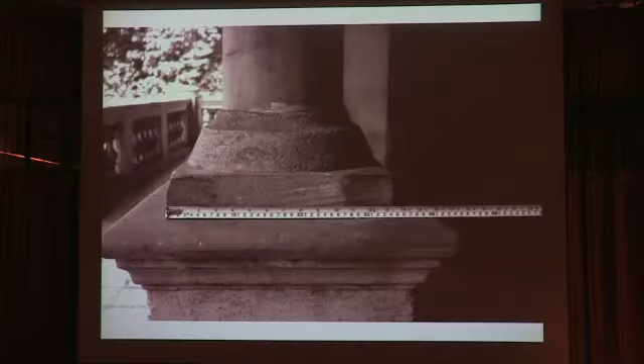The fallout of this work was interesting. Some of it led to legislative measures, and also spawned institutional structures and group research. We also began to engage with documentation—measuring and learning again how to put your hands down, to touch something, to scale it, to represent it—which was so fundamental, especially in this age where technology sometimes overrides our own intuitions.

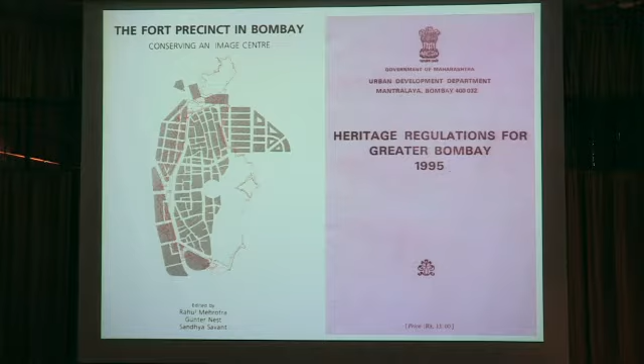And some of this documentation became cumulative and led to legislation. This was the first legislation to protect heritage precincts in India, which came out of some of these research and engagement efforts. And the documentation was widespread.

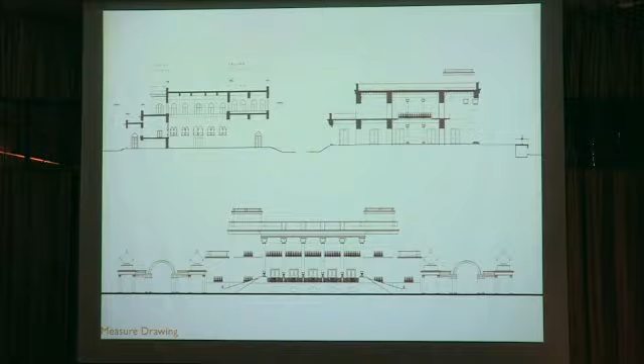We were involved with historic buildings. I'm not going to talk about those today because that's a lecture in itself, but Jim alluded to some of this—actually measuring these buildings where there was no information, and the hundreds of drawings that were constructed as a result. This research and engagement with the issues of the city and its governance led us to understand that the notion of significance is something continuously made and constructed.

It gave us agency to grapple with these conditions, historic places, in different ways. And significance is not about discovery or articulation as much as it's about engagement, construction, and making.

In fact, in cities like Mumbai, meanings are not stable. Even the name changes, as you know. And here spaces and images get consumed, reinterpreted, recycled.

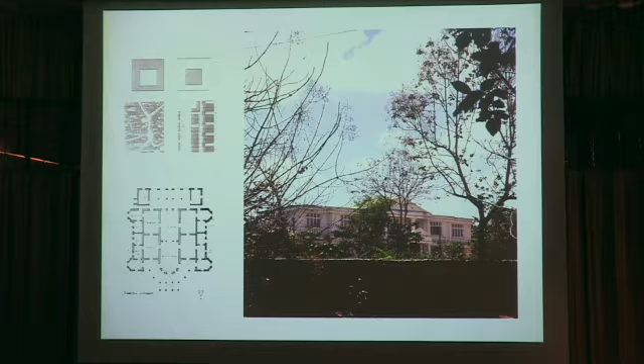And so then can you actually work around this? We attempted that, because as a practitioner starting out there, our first commissions were houses for urban people who wanted to build weekend places in these rural kind of locations.

In this house, for example, we made a gesture of generosity, and the client was enlightened enough to understand it, where the living room of the house was a big veranda, and the chairs all go in, it gets closed, and this space is a gift to the villagers with the tap. So while they're not there for most of the year, the villagers can actually inhabit it. I've even seen a wedding occurring there, the caretaker and his friends, etc.

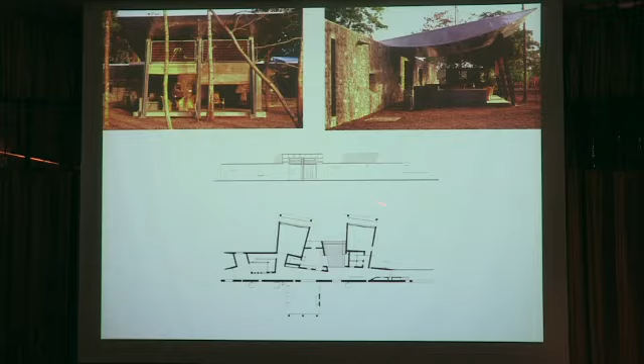But it's a way of softening the threshold, and these signals in architecture, I believe, are really important. So that's the space that's sort of a gift to the village, whereas the bedrooms, etc., are more secure. They face a garden, with all the paraphernalia, what a suburban house might be.

This was another example where we built a house in an orchard in Ahmedabad, outside Ahmedabad, and instead of placing the house in the periphery of the orchard, like most of these houses are, which is part of the colonial paradigm, we decided to place the house absolutely in the center of the orchard with a natural water body there, which without chlorination, serves as a lap pool for the residents when they come there on the weekend or once a month.

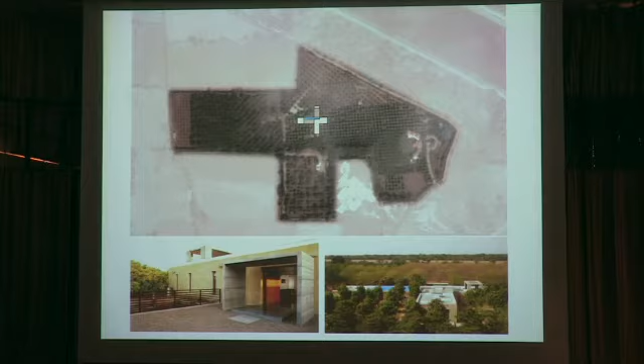But then it becomes a pool for washing the fruit, which the workers in the orchard can use. So by changing that relationship of the master's house commanding the orchard versus it becoming a kind of working unit within the orchard, I think it begins to signal different things.

And this is the water pool, so it's photogenic, it's a lap pool which people enjoy. They enjoy the courtyard, the privacy, but when they go away, there's another door which allows access to the villagers, and you can unplug this and it charges the well. So there's no filtration or chlorination plant in the house, and you have a separate entrance.

So the workers then occupy, and they have a different association with the space, and they appropriate it, so to speak, for most of the year. I think these are little ways in which these spatial arrangements can be modulated.

In fact, locally it's called the tea factory, which is very nice because it's not associated as the house of rich people, but rather people think it's a tea factory. And the production of tea sort of goes on. Of course, it's a very sensitive landscape.

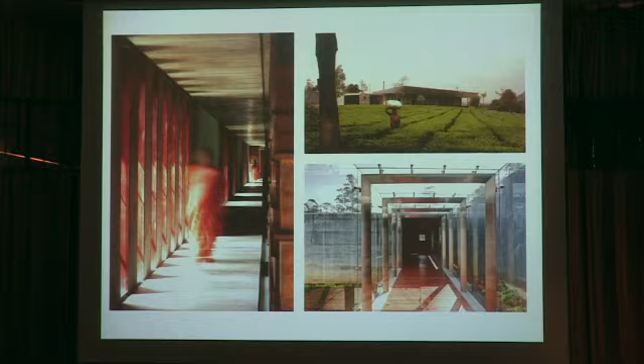So it's very transparent, and it doesn't give out the signals of being something that's cut off from that terrain, but rather transparent and therefore visually accessible, in a working tea plantation. So this sort of symbiosis between these two completely different cultures, where urban cultures are coming to bear on a kind of suburban condition and threatening in some ways, is dissipated by softening, I believe, these thresholds visually.

Then the question of building ecology, and that's one that's really, really important, because I think sustainable design, as we begin to see it, should be a combination of social ecologies, economies, and physical design, and this sort of gets siloed in our debates.

In fact, Mohsen isn't here, but one of his early books called Weathering was very insightful, and I learned a lot from it and realized that our debates have become about weatherproofing. They're not about weathering. And so our materials and the selection of materials don't account for weathering.

Rather, all the emphasis is on sealants and double insulation. And so weathering has moved to weatherproofing, which means we've really taken climate out of the equation and out of the discussion. And so therefore, the palette of materials that we've shifted to has also responded to that shift in mindset in the way we look at this.

And I think that is an important reminder because it opens up a whole world, not only in terms of material textures, but it's a critical question when we talk about sustainability and these broader ecologies.

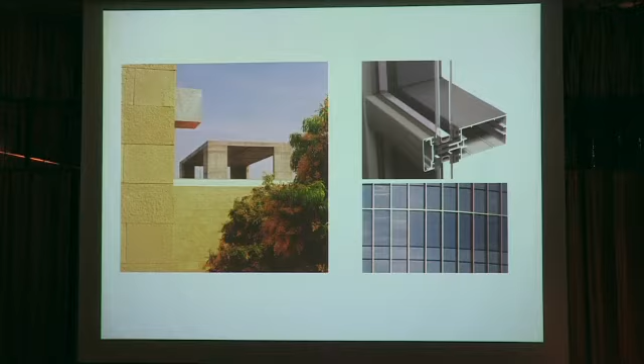In India, when I started my practice, things are now better with the economy, but 20 years ago, you were always afraid that your building would stop halfway. So we began designing buildings such that even if they ran out of money halfway, it didn't look incomplete. We were always preempting or anticipating this sort of extreme condition.

And so this imagination of design as incremental, I think, is something that we very much picked up on. And the social is one of the materials of architecture that we cannot escape working with.

I think if we talk about sustainability and we don't talk about the social as material, it can't be the only material, but it has to be something we articulate a much finer debate around, because its implications on the organizational aspects of buildings is as much as technology and more obvious material components that actually make the building.

And I believe the rating example, or the rating approach, when we talk about climate, is how this broader ecology of building is ignored in the quest for focusing on material. I think the rating in particular tends to perhaps unwittingly create a hegemony of the US codes universally. And we deal with this in India all the time.

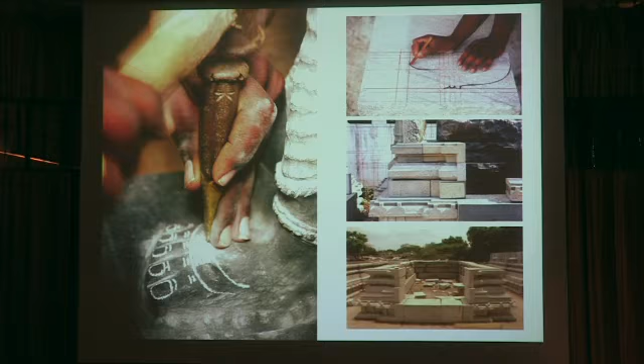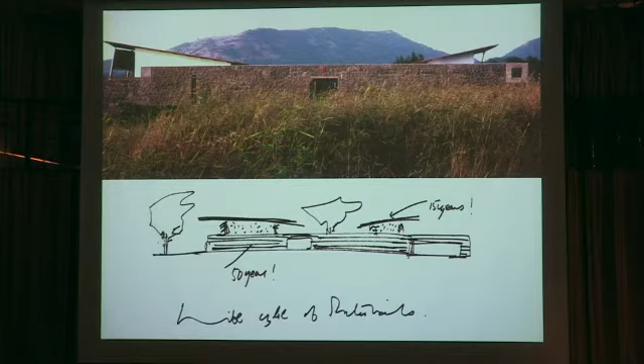The lessons through conservation back into contemporary practice are at many levels. It's understanding practices, it's also understanding how materials weather, and understanding how materials weather is related to crafts. I think this is something that needs much, much greater discussion.

Then, of course, the question of the local and global. We've always heard think globally and act locally. Unfortunately today the most powerful people in the world are people who think locally but have the ability and power to act globally. So there's a complete inversion.

That's the reason I've divided the next part of this talk into local programs and global programs, because I believe the real challenge is how do you localize global programs and how do you globalize local programs? I think this is a very interesting question for me.

And here, for example, the presence of the ancient, the presence of religion in the way it's related to craft making and building is very important. There's a resurrection of what we call Vastu, which is like Feng Shui, and it's amazing how this has become a full-blown practice in India. I would say 90% of our buildings actually have incorporated this. What does that mean? Why do you resist it, or how do you resist it?

Because it's actually quite abstract, it doesn't stipulate form at all, it only stipulates location. The practice of Vastu and its popularity is clearly bringing a new conservatism, in a sense, to the realm of architecture and the innovation of form, without necessarily challenging the emerging vocabulary and imagery of global identities. So it's interesting how one is challenged by how one can actually embed this in the work.

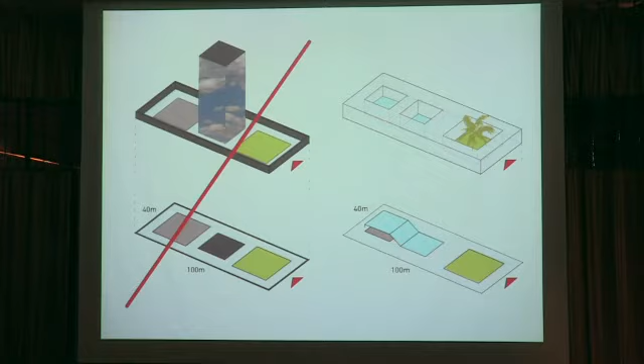They had a 40 by 100 meter site. They wanted a high-rise tower. They had a collaborator in Australia who was going to give them a license to bring curtain glazing, parking at the back, garden there. Of course we argued, we were despaired by this whole idea, and we managed to convince them to go into the big footprint building, and it raised a lot of interesting issues for us because this was when we were just liberalizing our economy and everyone wanted the icons of globalization.

I felt that this company was so well situated, they were very sophisticated people, that they could confidently build their own identity, not responding to the sort of globalized materials, but actually beginning to pick up on the traditions that occurred in the area of Coimbatore, which is in South India, where this building occurs.

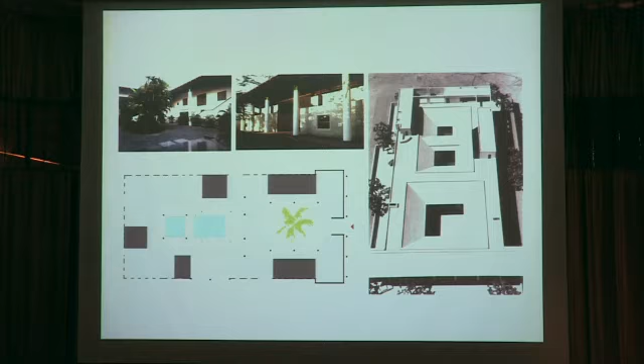Sorry, these are burnt out a bit, but it's organized around a series of courtyards, and this is a sort of progression through the courtyards. It's got a large roof which holds the top of it, and these courtyards actually have water which helps to cool the building, so it's passive cooling, and that's what the spaces feel like.

It's all ventilated corridors. The offices are just one room deep, so you have natural ventilation. There's about a 6 or 7 degree centigrade difference between the outside and inside because this is in the rain shadow. It's very dry, and just the circulation of water, the noise of water, has an incredible cooling effect on the building. And the verandas or the circulation spaces are what are used for meetings, or people come out to meet each other from the 7 or 8 offices of this corporation that are housed there.

As you go into the building, it gets more intimate, where the management sits, who are the owners of the building. It's a large family. It's a family-owned building, so it sort of alludes to a house, and the scale changes completely.

But it's naturally ventilated. It's got air conditioning provision, but they use it when they need to, which is very minimal. It also uses the local materials of the area, like it's a 20,000 square foot clay tile roof with 2 sets of clay tiles, one decorative and the other a regular roof tile, so that you get insulation, but you also get these patterns.

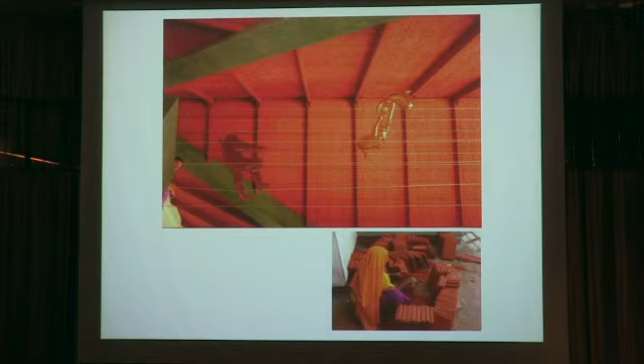I believe at the time it was done, in 1995, 96, it was the largest tiled roof being built in India, because people were only building those for homes, and they'd abandoned the use of this very simple, very beautiful material. And also granite, for example, we use granite from the local quarries, but we trimmed the edges where you had the drilling from the quarries to create a waterfall, so you got the ripple effect just out of the edges of the granite.

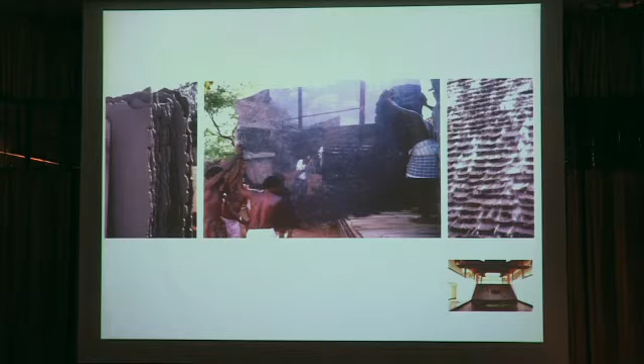So no material was really wasted, and that really was a constraint we set ourselves, and it really worked out that the waterfall needed something like this. And of course, art of many kinds was incorporated.

This is the Cosmic Egg, which is a very precious piece, which was displayed. These are 10-meter, 20-meter wide murals painted by traditional painters from Kerala who don't even use a sketch. They have poetry they recite while over 10 or 15 days they construct these murals. So we incorporated a whole range of craft.

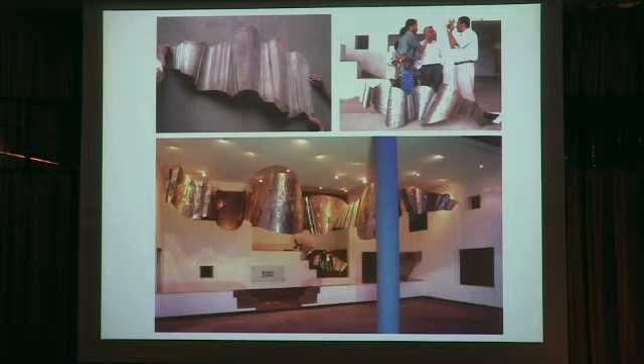This is what would be traditionally made in cloth, but it has 108 Lakshmis, because Lakshmi is the name of the company, which is the goddess of wealth, of course. And the 108 Lakshmis are sacred, so that's the figure that was used.

And Manjit Bawa, who was one of India's well-known painters, who only painted on canvas, worked with us - that's him in that image - to translate his figures to create railings for the building. So all the railings in the building are his figures, scenes from forests and animals that dance through the space.

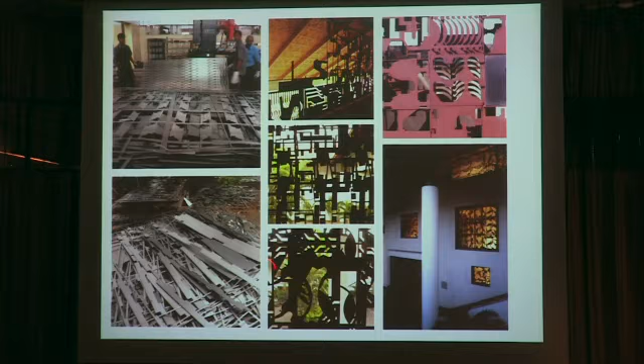We also used scrap metal from their machine tool companies to create traditional jalis, or screens, that facilitate natural ventilation. We created about 24 patterns with different artists using scrap metal from the machine tool plant, which we salvaged as they were doing pressings for different components of their machines. This created a whole vocabulary of screens right through the building, and the porosity of the screens changed depending on where they were placed, if in front of toilets or in offices.

So depending on the porosity and transparency, the layering was what we played with, and it was constructed in a way that it could be dismantled easily, to be cleaned periodically, etc., including this sort of large end portal.

This is really a global program, and this was an extreme because we got engaged with this not only at the beginning of our own practice, but also at the beginning of the liberalization of the economy in India. We felt very strongly about resisting these sort of global images that land on our doors - this is not our project, but these are the kinds of things beginning. This is in Jaipur, which goes up to about 46 degrees centigrade.

And it's mad - these are IT centers, and with information technology in places like Bangalore, everything is being built like this, which are just basically wrappers. It's ridiculous because when you go into these buildings, they have very expensive blinds which have to come down, otherwise you get glare on your computers. So you don't get the view out there, so why are you using the glass? It's really related to image, and it's extremely expensive.

After this, we got this project for Hewlett Packard from Palo Alto, but they were building in Bangalore, and we got appointed to do the second phase of their campus. The first phase was built by another Indian architect, which followed the same pattern that I just criticized, and therefore I will not name him.

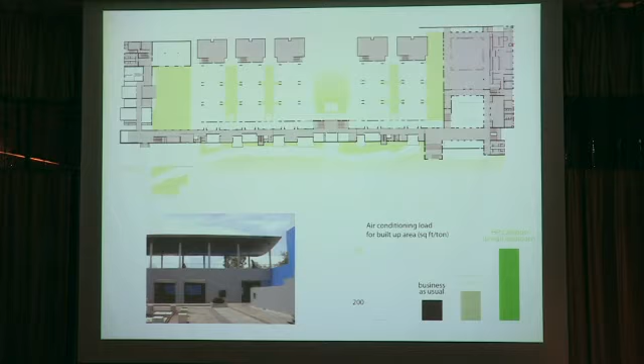In that street, you can play with architecture, with light, with volumes, with places people can sit, different materials. It's more social - people meet, people can see each other, they can set up points of meeting, rendezvous points. It sets up a completely different vocabulary, which in the other building I showed you is an impossible thing to achieve.

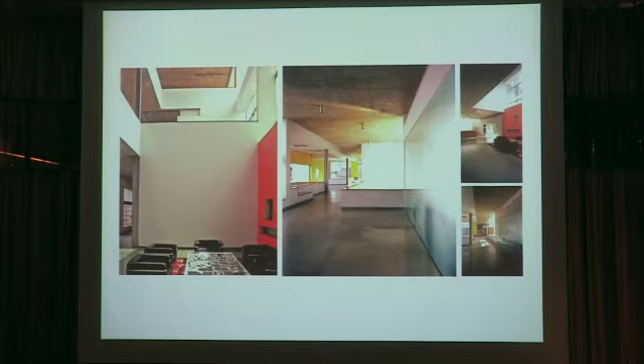And that's what the dining rooms feel like - different pockets and niches where you have more privacy. You look at gardens, it's all naturally ventilated.

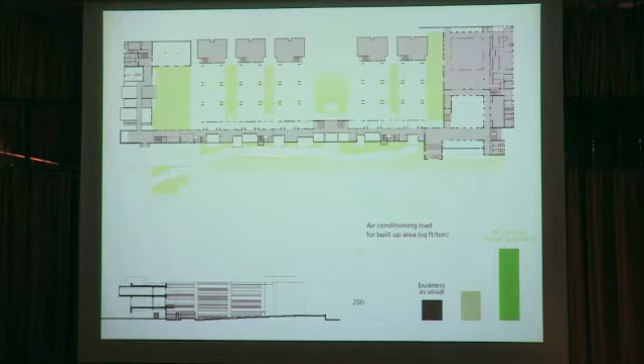The green was also used strategically to help with insulation. We had a natural cover of trees here, so that was easy, but within the courtyards, within the block - this is where the software blocks are - the windows were just at eye level, so when you work on your desk, you see the green. The rest, you don't have blinds, none of that. It's very cool with very little air conditioning.

These are where the generators are, these are the mechanical boxes at the end, and you get these thick gardens which insulated. There are points you can go into the garden to meet. The gardens are quite different, so there are no lawns which need high maintenance - this is just natural landscape which grows wild, and you can trim it and play with it as you want.

I think that really was the main contribution there, making that shift in terms of what needed air conditioning and setting up a whole new vocabulary as a result.

That led us to another project in Hyderabad, which is interesting - that's a building by Mario Botta. These are IT buildings that are springing up, exactly like the buildings I showed you, or that building in blue glass. We got this site for an infrastructure company, which was very interesting because they're in the building construction industry. They've just set up, they're young people, and they wanted this sort of global image thing.

These were the two paradigms we looked at. This is what I call the architecture of impatient capital, which gets created really quickly. What you notice here are nets, built because there are riots in Hyderabad now, and these buildings are targets to attack, because all you need to do is stone that facade and you've achieved a lot. So now vendors selling curtain glazing also sell details for nets and canopies to protect the glass, and it's developing a whole aesthetic. That's what we rejected.

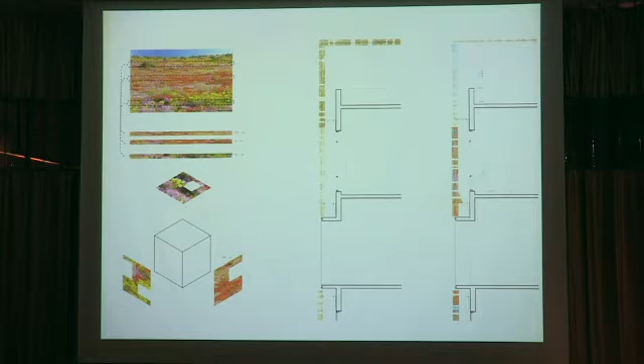That was really inspiring, so we picked up on that and came up with a solution of doing a building with a green wall. But this isn't a green wall as usually seen, stuck onto the facade. This is a green facade with a misting system built into it, which cools the building periodically through evaporation. That's the building we came up with.

But then we expanded that to create a whole vocabulary of... let's see if we can adjust this a bit. Is it possible to adjust the colors, Doug, or is it too complicated? These are burning out.

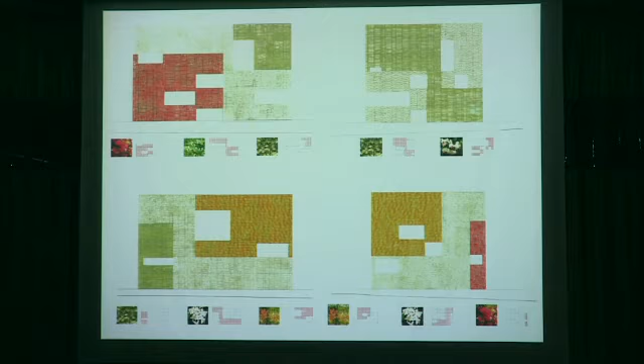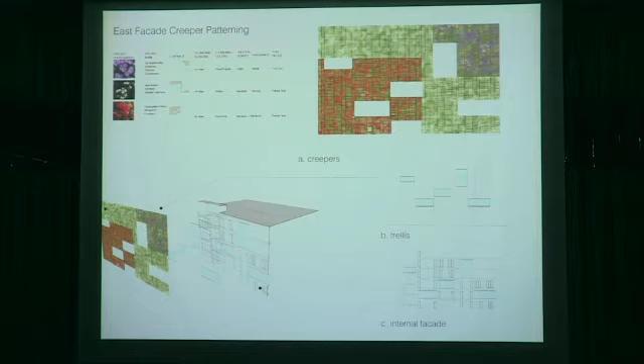Anyway, looking at many local species, we created a different pattern on every facade, with flowering and non-flowering species, so the building wouldn't look the same if you returned 3 or 4 months later. It would be dynamic, based on the seasons. In winter it would burn out and let the sun in, and in summer it would get really thick. It had 3 layers: the planting, a trellis, and a simple spec building behind. That's what the building looks like.

We constructed a ground, and these are hydroponic trays you see, with scaffolding around it.

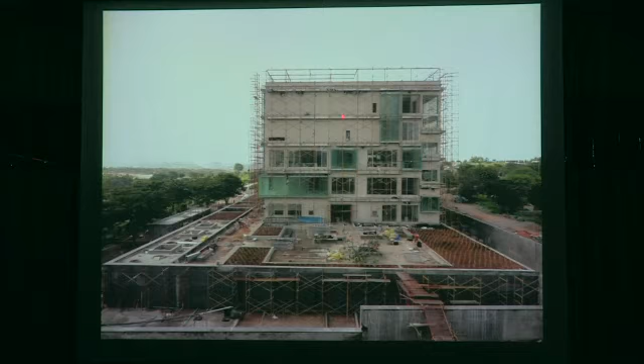In India, it's interesting - we hadn't done a building this high before. All our buildings were quite low-slung. I was always frightened because everywhere I looked in India I'd see 5, 6, 7-story buildings that looked beautiful while the scaffolding was up, but as soon as the scaffolding came down, they looked terribly made. That's why people use alucobond and glass, because it predicts a good level of finish. So that's how this idea of the trellis, trying to construct something solid, came about.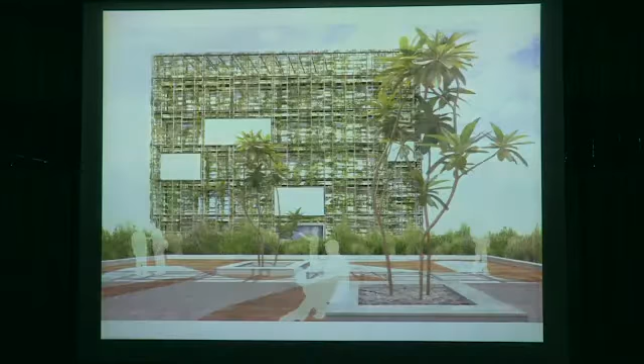That's what we imagined with the trellis and the green on this ground. We spent a lot of time constructing the trellis, and again we didn't want to give it to a big corporation or build it in a big city. We built it near Hyderabad, in a little village, in a shed this guy built specially to make the trellises. That employed 15 people.

It was all handmade, using whatever dies and processes you need for aluminum, but we didn't want finished aluminum, so it's textured, feels very handmade. It's carefully constructed to incorporate the misting system and the plumbing that controls it, all handmade by 10 or 15 craftsmen in that little village, then transported close to the site. That's what the finished product looked like when it was done.

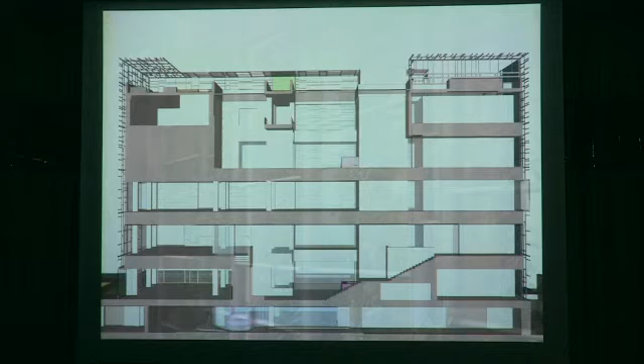You can see the profiles of the trellis, and how the plants are beginning to grow. This was just finished about 5 or 6 months ago. The building in section is also - it's not a spec building.

It has a series of courtyards that allow the building to breathe naturally, and they also become like atriums. That's some of the interior views of the building. These atriums have skylights that bring in light, so you have natural lighting. You can see the green on the edges.

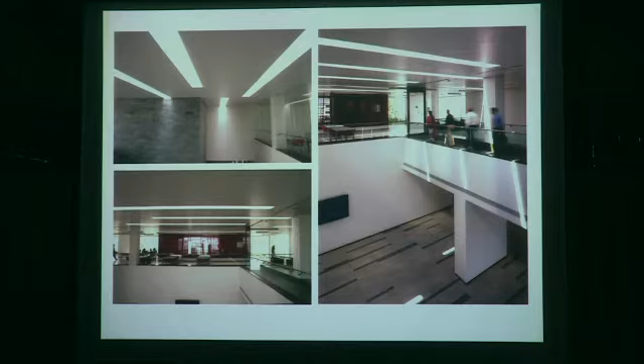One of the interesting moves was we put the gym for the building right in the middle of the cafeteria, so people work out and watch each other eat and are really conscious about what they do. It was sort of a move, and now it's beginning to get populated.

You can see the flowers of different colors and the patterns. We're beginning to light it using woks, which are very inexpensive and used for street food. We've been doing studies on how to light it, so it'll be lit based on the species, producing light that is appropriate. The patterns are beginning to appear with the different colors of the flowers.

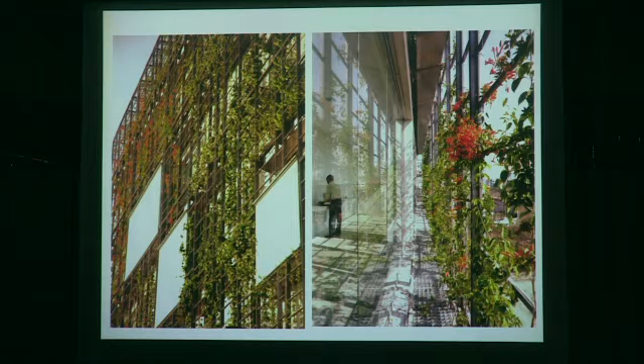This is a walkway where a gardener can actually walk and work without disturbing the office. It's a completely separate facade with hydroponic trays and its own misting system that protects the building.

For me, again, this idea of softening thresholds: you have gardeners working, you have the CEO in a meeting. You have these worlds subtly collide on a daily basis, because this needs upkeep, which for me is a really important moment, and one that we've encouraged. I think the clients begin to understand this after a point, and it's really interesting.

That's when the misting system is on. It actually cools the building, and you can control the amount of misting depending on the temperature and how you want it to cool.

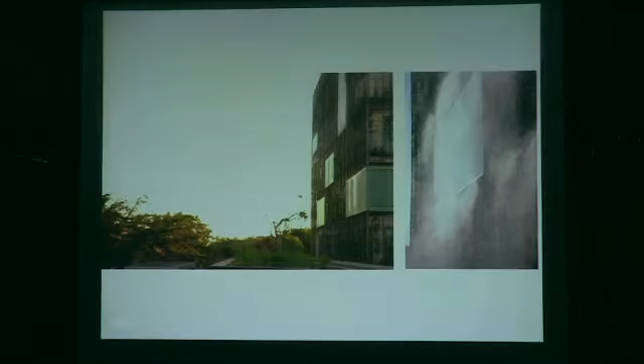We are beginning to do studies. We've got young scientists now mapping this through the months to actually see what the performative aspects of the building would be, and then to try to fine-tune it. As the planting also grows, we begin studying what species needs how much water and how one can calibrate this a little better.

I then go to the last section of the talk, which is these local programs and how do you globalize them. Local programs come out of contingencies in very, very clear localities, which throw up all sorts of problems that sometimes don't have a universal solution. The tendency, and these are NGOs and many other parts of civil society that engage with the improvement of these conditions, is that they tend to be caricatured as being local.

So you begin, as architects, to get pushed into a position where you engage with vernacular imagery and aesthetics. You begin to caricature actually the condition, which I find problematic. Therefore, I think this idea of globalizing local programs is something we've been very interested in.

This is an institute we did for the Tata Institute of Social Sciences in a very remote village, Tuljapur. It's about 500 kilometers from Mumbai, but inland, very dry. What we tried to do here was experiment with passive cooling through wind towers and picking up on local vocabularies there, which is a rich man's house. The only thing that is celebrated is the entrance, which is the kind of vocabulary we followed here.

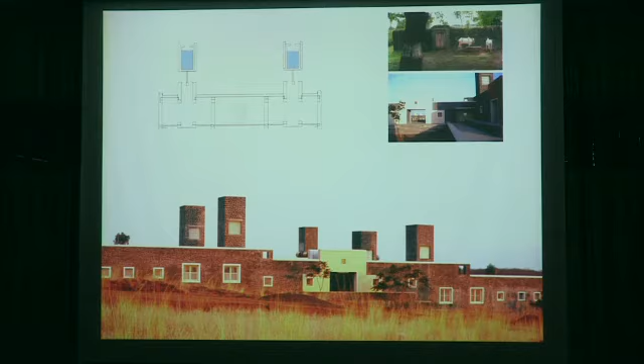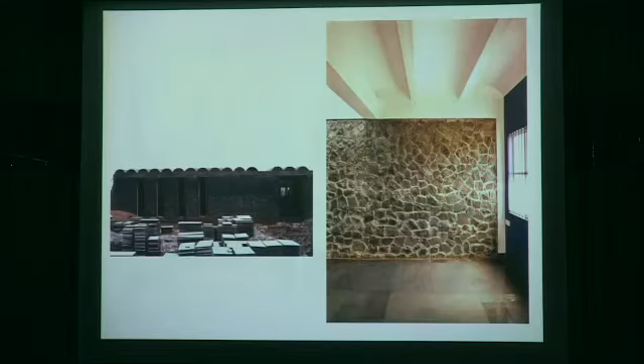We also experimented using ferrocement walls, which we constructed on site to train local people so that this module could be perpetuated. It's much cheaper, and it's a kind of modular construction, and the fill there gives you the insulation in that climate. So it's also a climatic response for the housing.

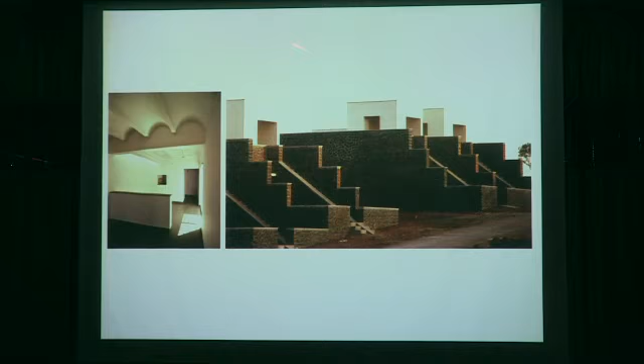By adding a terrace room, you begin to respond to the climate and add another space at very little cost. It sort of sits in a kind of fortified condition with internal courtyards and this system of cooling through water again, but much more subtle.

I must say it wasn't as successful as we thought, only because these are students who have lifestyles that are hard to control, so it's not as efficient as one was being idealistic and trying these sort of systems.

And then in a hot, humid climate, we experimented, which I think was more successful, in a very remote part of Goa: a think tank for 12 people, to be given out to intellectuals and institutions where they can take people for really introspective discussions. This is just a big roof, because here, as long as you have air moving through in the hot, humid climate of Goa, you begin to get cooling.

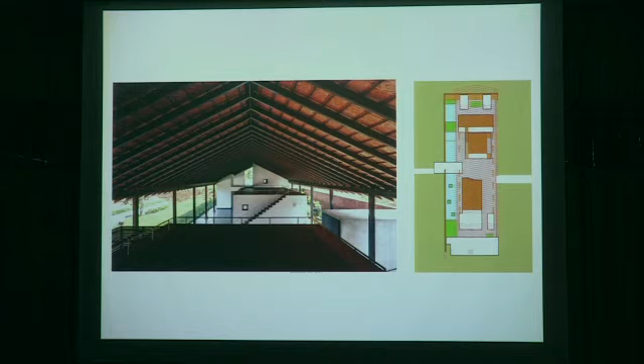So they're just a series of rooms. The decks actually become places people meet, or you can use for yoga. It's like a big hut with these rooms that sit in, very frugal, and creates a whole series of interesting spaces with different light modulations for moments of repose and discussion.

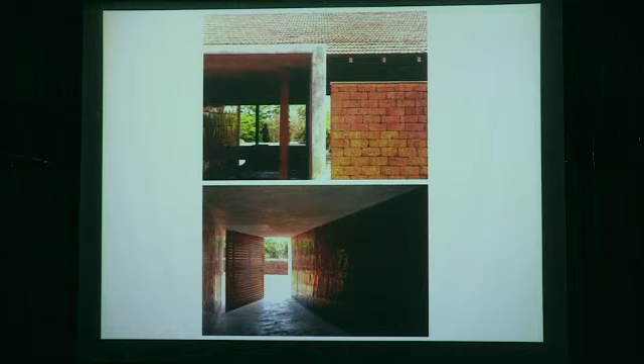A tube forms the entrance, which is in copper. Copper is associated with therapy and healing in India—people put water in a copper pot. So this is also meant as a place where executives would go, in small groups from companies or institutions, to do these workshops.

And here again, taking this idea of weathering, we use the local laterite material, which has high iron content, so it darkens and weathers and gets patinated over age.

The third project here is one for slum children, which is a whole different condition. These slum children—it's amazing just looking at that boy, how intact they are in spite of this incredibly deplorable physical condition.

An NGO we got involved with, called Magic Bus, has six red magic buses, and they take kids from the slums to this campus where they recreate, and teach them about hygiene and nutrition, and they play. It's meant for a weekend, but here for slum children.

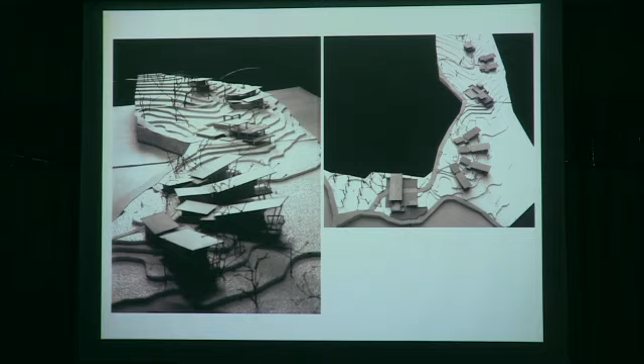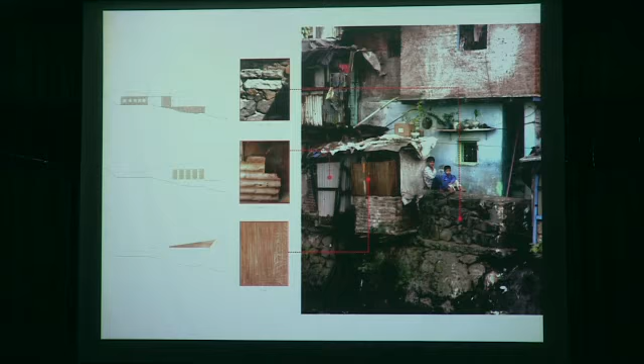So what we did was construct this series of pavilions, but the constraint we set ourselves was that we would use materials that exist in the slum only as our palette, but reconfigure them in ways that these young people would see familiar materials used in more sophisticated ways—almost implying that if they did get engaged with the construction or improvement of their own habitat, these would be lessons they might implicitly learn or imbibe. So we also imagined them through Photoshop as we were designing, in this case, a dormitory.

We looked at how they might get implanted in slums as a typology, where, for example, the dormitory you see here could also be a public toilet with a community space in a slum condition, so that as a type they were neutral enough to have a wide array of applications.

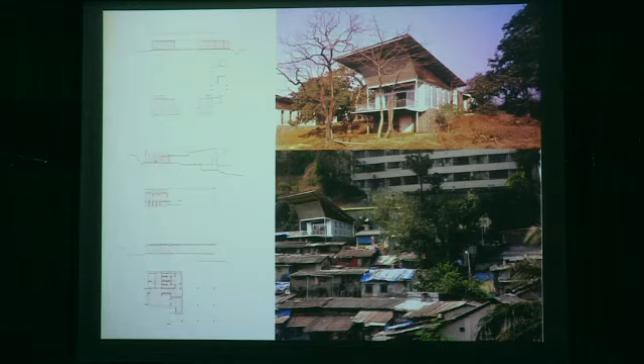So you then use this project, because the constituency is the same, to see how it might recycle itself as a type in useful ways, with this frugal use of material, because these are very, very simple materials.

This is what the dormitory looks like. The bays of the windows is based on bunk beds. The dining facilities are just an open veranda with a portal where you could put a plastic sheet or matting, so you could extend it in the summer or in the monsoon.

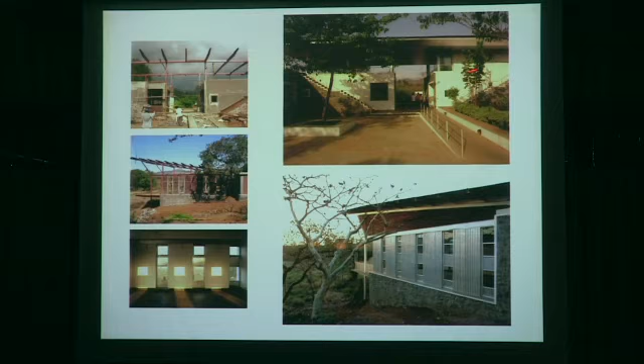There you see the pavilions, but it's very frugal again, using materials that are used in these places and are familiar to the inhabitants. The cladding is just metal siding or boarding, a very light frame, then clad with, in this case, just GI galvanized metal—not stainless steel or more expensive metals—which makes the kind of gateway to the institution.

And then, again, this type gets embedded in the slum, which led us to engage with this condition in the slum—the constituency or location these kids were coming from. For us to go back there, as we were mining our textures from here, it also made us really aware of the problems there.

Again, these are the same kids—you can see this guy, he's ready to go to school, he's clean, white socks, bright, but he lives in that sort of condition. It's absolutely incredible that that's even possible. And they're the same kids who go to the Magic Bus campus. But how could we do something here?

So we started working with SPARC, which is an NGO, and the National Slum Dwellers Federation, and started looking at the condition. It's amazing that, according to the UN Human Development Report, there's one toilet for 1,440 people in Mumbai. And according to this NGO, it was one to eight hundred.

According to the Bombay Municipal Corporation, it's 1:148, but the Corporation targets 1:50. Even 1:50 is absolutely amazing to think that there are 50 people using one toilet seat. It's mind-boggling.

So we said this is what we should get engaged with, and we began studying. These are what the toilets look like, and no one uses them, so everyone defecates out in the open. It's a terrible situation, and the World Bank and big agencies are putting a lot of money into it.

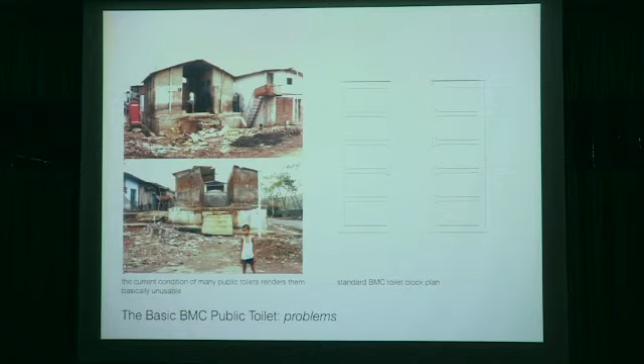So we evolved this type where we stacked it. We put the caretaker of the toilet on the terrace, gave him the penthouse in the slum. There's always a caste question here because the lowest caste is the one looking after the toilets, but by giving him the penthouse, you privilege them completely in terms of engaging them with maintenance.

We attached a community space to that area so children and women can use it. I got one of my clients, for whom we had done a house, to donate solar panels so it goes off the grid. That's important because it allows children at night to go and study there, or women to do adult education classes, and a whole spectrum of things which agencies like Magic Bus are trying to compensate for within the deficiency of these social institutions.

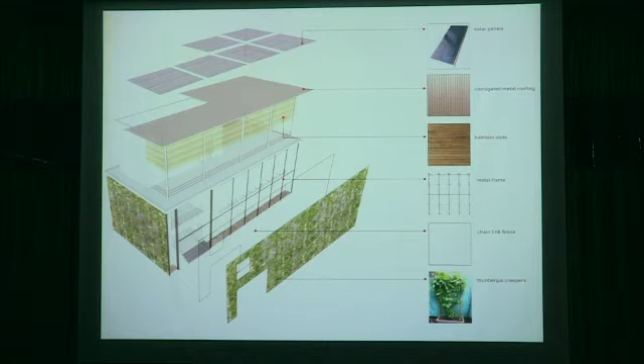So we thought if we could do something in that locale, it could be quite incredible. That's just a Photoshop image, but we did this for about 8 locations, and I can talk about it in the question time if we have it.

But there was a lot of resistance from the government because signaling something is also like building a constituency, which means the resistance for the slum to be removed becomes that much greater. Once you have a community center there, it's threatening for agencies, because people might organize themselves in much more fierce ways once they have a much greater sense of community, once you begin to have an icon.

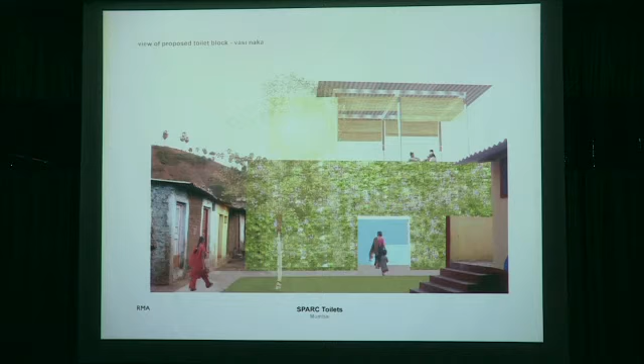We used the idea of cladding the toilet, separated by 4 feet with flowers, which completely changes the association of the toilet because you have flowers which are scented. We've built one very small one as a start, which was just finished a few weeks ago. We're going to see how this works, and hopefully I can spend part of my summer negotiating this through.

I'm going to end with this last project, which we've been doing recently. Both those people are the clients. Again, this is the question of the local program, and it's a really complex project. It's in Jaipur, for 100 elephants and their keepers, who are called mahouts. They're all Muslims, and the state of Rajasthan is a right-wing Hindu state, so it's a very difficult question.

These elephants are here by an accident of history - the Mughals brought them for ceremony. They're tropical beings who have no business being in the desert, and they suffer there greatly. These guys are poor - a mahout would earn 5,000 rupees a month, less than $100, and he has a family to support and the elephant to look after.

The elephant owners, who are a little richer, take some of the profit. These elephants take tourists up to the Amber Palace and other locations in Jaipur. That's how they're currently housed, where all the elephants, like in a garage, are stacked here, and the mahouts live up there.

That's problematic because the mahout and the elephant's relationship is incredibly complex. No one can control an elephant but the mahout, and it takes years to develop that relationship. So they begin living there because they have to be near their elephant, and this is a complete disaster. NGOs in Rajasthan put a lot of pressure on the government, and they instituted a competition.

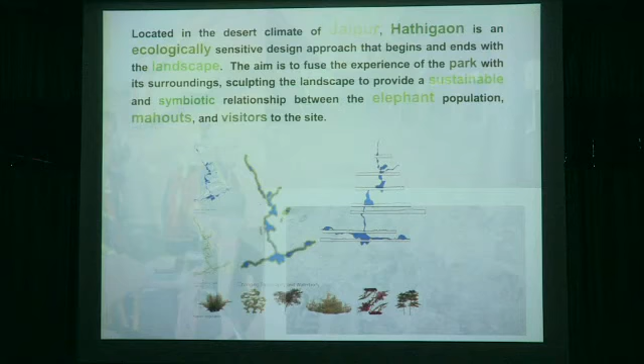And that was, again, a no-brainer. Our project was about the landscape, about how we could reconstruct the landscape. And that's what it looked like. And these are all the voids. So we said, let's concentrate on creating a habitat for these elephants.

It was a very hard thing to do because it's a public works department project, and there's a lot of corruption with the government. When I said, let's dig some holes and collect some water and put some plants to start with, the contractors thought, my God, this is disaster for us. So without telling us, they started constructing the houses first, because the kickbacks are in the houses. Luckily, the government fell.

We had managed to, and the project stopped, and we had managed to dig one big hole. For 3 years, that hole collected water, and the landscape began to generate itself. We've just restarted the project, and that government has been reinstituted, and now it's beginning to take some traction. So that's what we did.

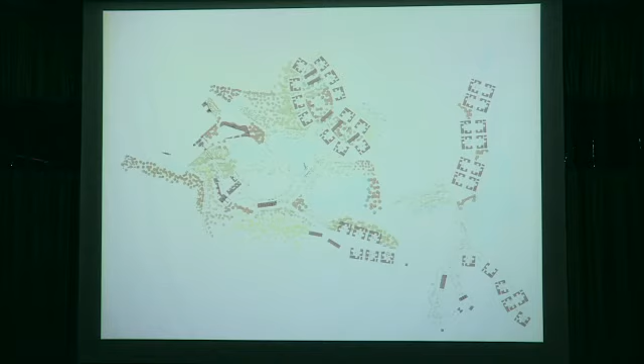We concentrated on creating micro dams for the water, and in the interstitial spaces, really putting the houses and the architecture, and kind of evolved a quite complex plan with different species depending on their proximity to water. And that's the house for the elephant, that's where the elephant lives.

The allocation of space for the mahout is only 200 square feet. So what we did was just made a small room, a kitchen, gave them a big courtyard, a collective courtyard, and added a stair so they could build on the terrace. In the demonstration unit, we showed how those pavilions could be added. We used Photoshop a lot to convince the government of the necessity for the landscape, etc. Some of it worked, some of it just worked by default.

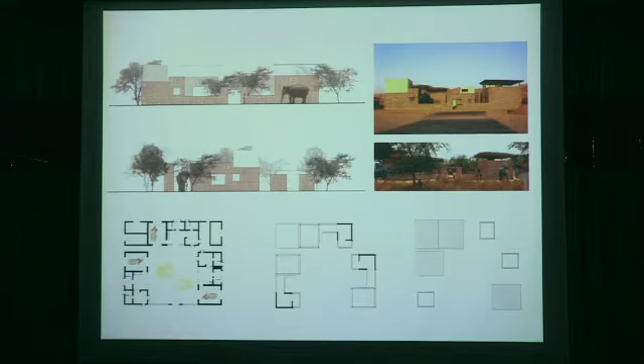And of course, the elephants were really cooperative. We used them to establish the size. It was wonderful working with them, because how do you... the elephants can't lie on flat ground because they can't get up, so they always lie down on berms. You have to engineer the floor very subtly to create enough of a berm that the elephant can get up. So the learning curve was incredible.

And so the houses were built. This was the pond that we just dug out on one of the quarries, and the elephants began enjoying it. But they didn't move here for 3 years, though they would come there every day from the palace when they had their time off, just to enjoy the water. Their health changed completely by the fact that they could use water, because they never had water they could bathe in for all the years they'd been there. It was absolutely incredible.

I would always go with my resignation letter from the project in my pocket, because every time I'd go there, they would do something really perverse on the architecture, which made me want to just say nothing. But then I'd go there and see these elephants bathing, and I would say, no, you've got to do this, you've got to win this project. So we kept going.

And that's what the site was when we got it. That's what the site looks like today. It's completely transformed just because of that pond that we created. It's amazing, the transformation in the area. We went into an aggressive tree planting effort. Birds are beginning to arrive there and get attracted. There's a whole ecology that is developing around this landscape.